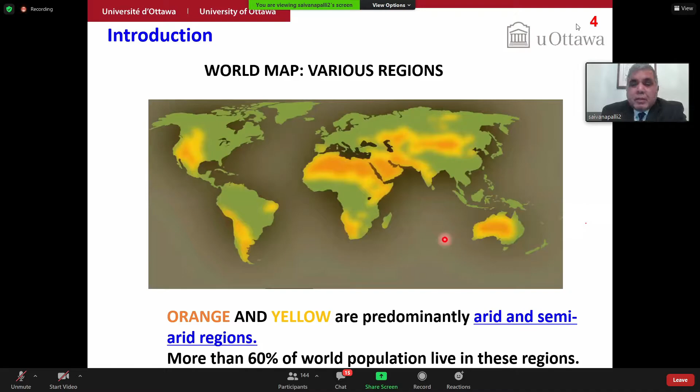That was originally developed by our pioneers, Terzaghi, Skempton, Peck, etc. Irrespective of the region, what we try to do is use the same traditional approaches, but that may not actually be valid in all scenarios.

If you try to see in the world of soil mechanics, below the groundwater table, soil is in a state of saturated condition. But most of the infrastructure that we actually construct is in unsaturated soils, whether it is foundations, retaining walls, roadways, pipelines, etc. There are many things, including slopes. A rational approach would be to take into account the influence of both unsaturated conditions as well as saturated conditions, such that you have a rigorous approach.

I'm not going to discuss all the things, but I would like to provide a background of how shallow foundations and pile foundations can be designed in unsaturated soils, and I will try to compare with saturated soil mechanics.

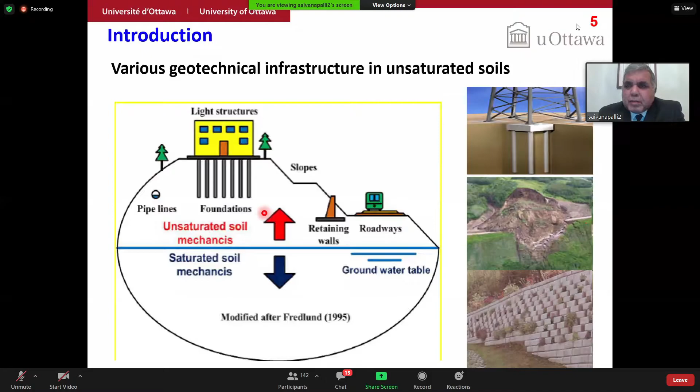I would be going a little fast because I have to cover a lot of ground, but I'll try my best to still provide all the details, though most of the information is in the papers already in the proceedings.

We all know below the groundwater table, the pore water pressure increases in a hydrostatic condition, but above the groundwater table, the soil is in a state of unsaturated condition, which we call the vadose zone. Here there can be either a hydrostatic increase in pore water pressure, or if there is more evaporation, there will be more suction. And when there is infiltration, the soil can actually saturate gradually.

So you can see above the groundwater table, you have to actually use unsaturated soil mechanics, where most of the soils and most of the infrastructure actually is.

When the soil is saturated, it is a two-phase material. When the soil is completely dry, again it is a two-phase material. But in unsaturated condition, you have to take into account the influence of all three phases, which is solids, liquid, and air, or soil, water, and air.

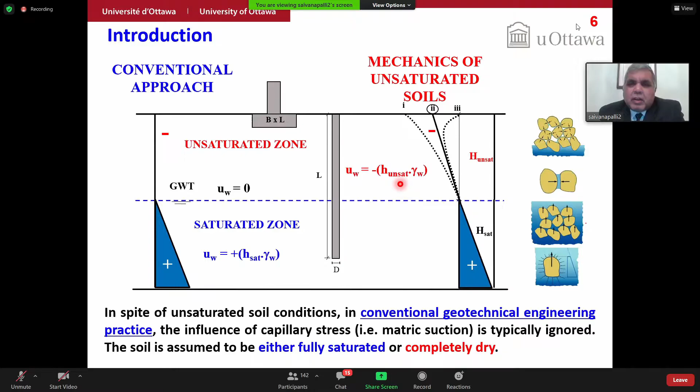In saturated soil mechanics, we use shear strength and modulus of elasticity as tools in the design of foundations. In this presentation, I would like to show how these two properties, shear strength as well as modulus of elasticity, can be used in the design of foundations in unsaturated soils.

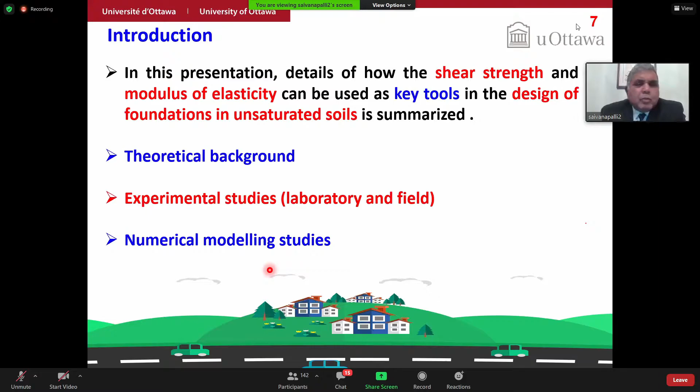There will be a brief theoretical background, then we will verify the theoretical background with experimental studies, both in lab as well as field, and then we will have numerical modeling studies to show how it can be conducted.

So for background, I don't have to explain this, everybody knows. For effective stress analysis, Terzaghi has given the equation, sigma prime equals sigma minus UW. We use this to determine the shear strength parameters, C prime and phi prime.

As we already talked about, we know the soil below the groundwater table is saturated and above it is unsaturated, so you have to take into account the influence of negative pore water pressure. This negative pore water pressure with respect to atmospheric pressure is what we call suction, and you can see there are different phases, and the colors clearly demonstrate that you have all three phases.

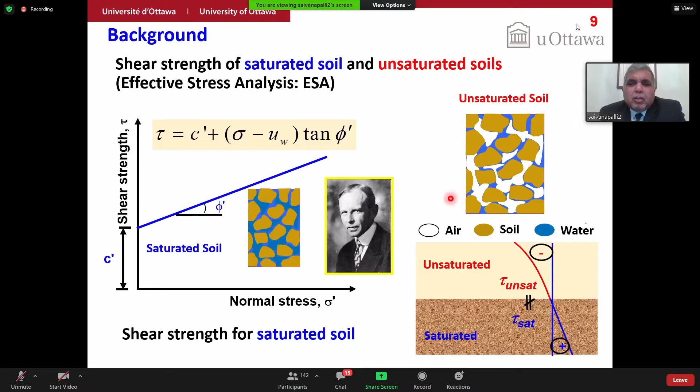Most of us know, or at least it has been briefly introduced, the specific equation that extended the success seen for saturated soils, the equation given by Terzaghi, which is widely used. He tried to use in the same form an equation in terms of net normal stress, sigma n minus UA, and UA minus UW, with one parameter called chi, and chi is a function of degree of saturation.

So when degree of saturation equals 0, the soil is dry, this term vanishes because chi would be equal to 0. When soil is saturated, then chi would be equal to 1. Then you would have an equation that could easily move into the saturated zone.

But a more rigorous approach was actually provided by Fredlund as part of his PhD, working under the supervision of Morgenstern.

You can see sigma n minus UA and UA minus UW are the true stress state variables; they are independent stress state variables. So the friction that is generated due to the influence of net normal stress is not the same as matric suction. So you cannot combine them exactly into one particular equation as you see here.

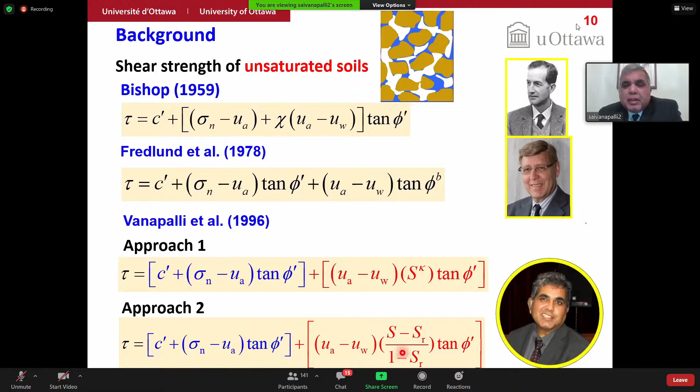A more simplified approach would be to use this without having a fitting parameter. You can take S minus SR by 1 minus SR, where SR is the residual degree of saturation, we will see what it is. All we need is angle of internal friction phi prime and C prime, which is the effective shear strength parameters, and then we can use the soil water characteristic.

What is a soil water characteristic? When a soil is initially in a saturated condition and you subject it to suction, there will be a desaturation. At one particular value, when the suction is increased, water starts escaping and air starts entering, and therefore the degree of saturation actually starts decreasing.

So you can do a little construction method using tangents, and you can find the point approximately where air enters, and the point at which it becomes very difficult to actually remove water by desaturation because there will be adsorbed water, etc.

So there are three zones you can classify to explain how the soil water surface changes: the boundary effect zone where the soil is saturated, the transition zone where air enters and there is a steep rate of desaturation, and by the time you come further, the desaturation becomes very, very slow. So we have developed a technique using approach 1 and approach 2, and you can use the soil water characteristic curve as a tool for predicting the shear strength.

In a similar way, we can also use the soil water characteristic curve for predicting the modulus of elasticity. In the same fashion, it can be used for predicting the bearing capacity, both under drained condition as well as undrained condition.

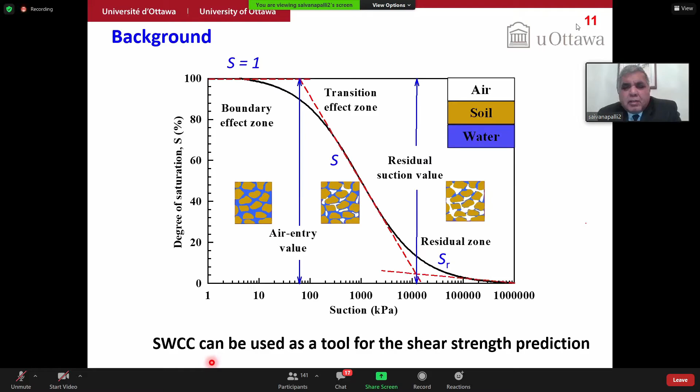So based on what I said before, here is a completely saturated condition, and you can see when the degree of saturation is close to 1, the angle of internal friction phi prime is equal to phi b. Once the air starts entering, the rate at which the shear strength increases starts to decrease, so there is still an increase, but not as much as in the saturated zone.

But when you're in the residual zone, if it is a sandy type of soil, the strength starts decreasing, but in types of clays, it will still be increasing. In some other types of clays, like silts, you will see a nominal change.

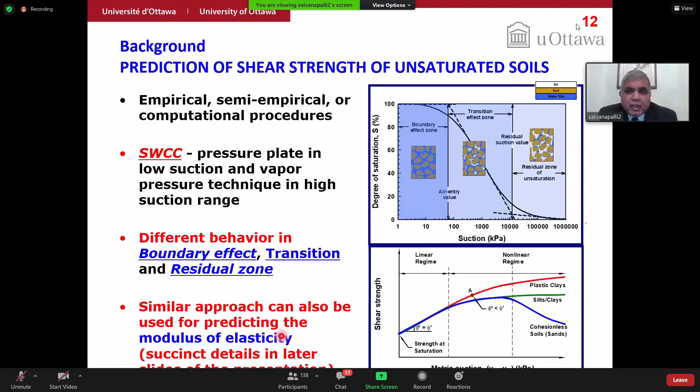The same approach we have used here can be used for even predicting the modulus of elasticity. I'm not going to go into all the details to save some time. Here are some experimental results with which we have predicted using both equations, and there is a good comparison. The symbols represent experimental results, and the continuous lines are the predicted envelopes.

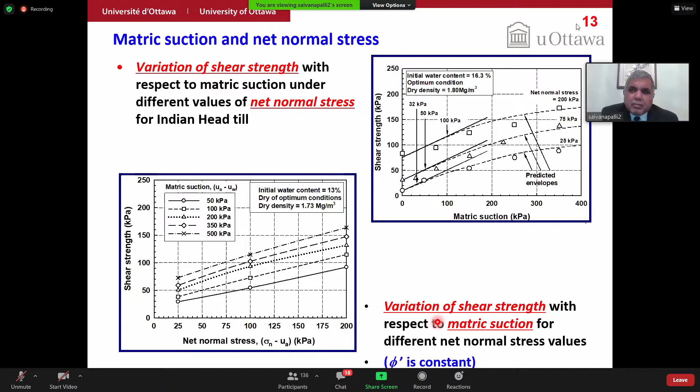If you are cross-plotting, the slope of shear strength versus net normal stress would be equal to phi prime. In other words, phi prime can be treated as a constant value. That means we have a very simple equation for predicting shear strength: one part is the same as saturated soil, and for the other, you need the soil water characteristic.

So now we have seen there is a parallel between the shear strength of saturated soils and the shear strength of unsaturated soils. Let us try to see Skempton's approach. Skempton has taught us what total stress analysis is. Here, phi u is equal to 0.

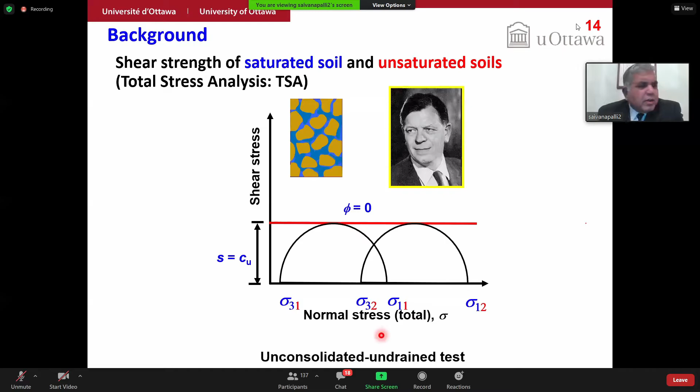You can do an unconsolidated undrained test or an unconfined compression test to get this information. Based on experimental studies, we developed an equation of Cu unsat, which would be equal to Cu sat, that is unconfined compression stress, plus the influence of matric suction, with two parameters, nu and mu. There are empirical equations to find these values, and then we get a good comparison. All we need is the unconfined compression test value, matric suction, and the soil water characteristic curve.

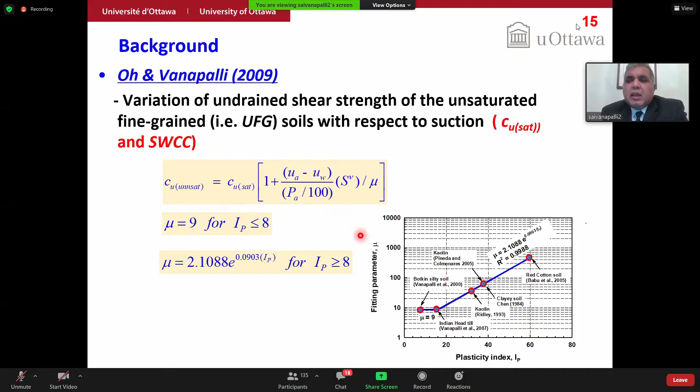You can see the soil water characteristic curve can be used as a very good tool. Terzaghi and Skempton have given us the bearing capacity equations in undergraduate classes, and everybody is introduced to these topics. So I wanted to see how we can use this approach.

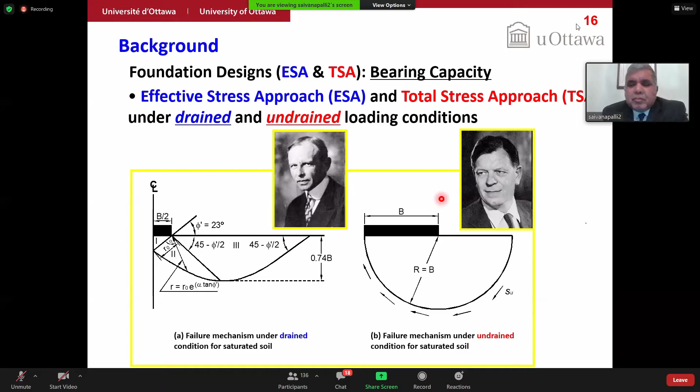It should be a simple approach, but one that can be extended for unsaturated soils. That is the key objective of this presentation, which is the work of several PhD students, but I have combined all these pieces of work from these students to provide theoretical background, some experimental background, and also numerical studies.

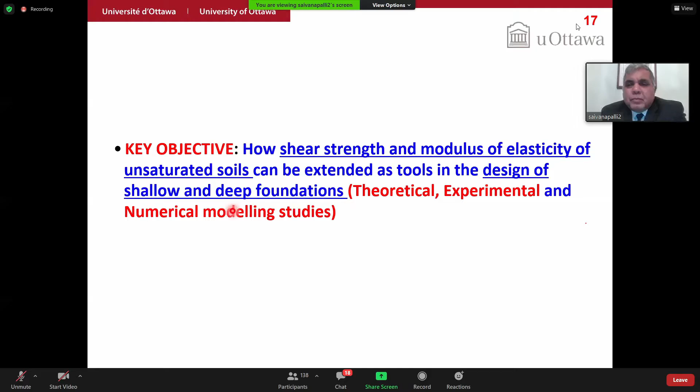The numerical studies are more recent work undertaken by two students who are co-authors, Mengshi Tan and Cindy Shinting Chen. I'll show their pictures. Now, what are the theoretical studies?

Let us see how you can modify the effective stress approach that you have seen for saturated soils to unsaturated soils. This is the equation we already know, Terzaghi's equation: C' Nc plus gamma Df Nq plus 0.5 gamma B N gamma. Everybody knows this. This is for a strip footing, and these are the bearing capacity factors.

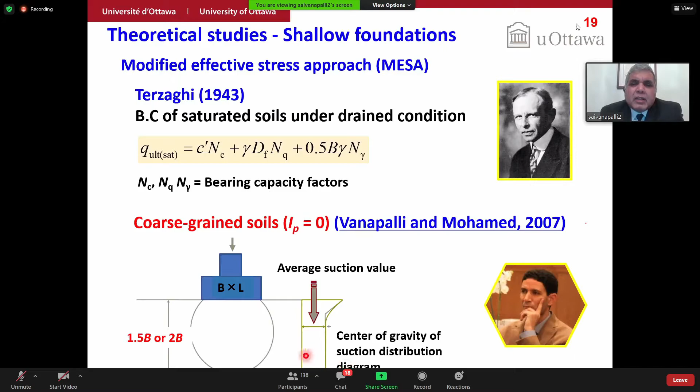One of my students, Fathi Mohamed, has developed a technique. If you look here, the stress bulb that develops is typically below a certain depth, in this case 1.5 to 2B. All you have to do is find the centroid of the unsaturated zone, take the average suction value, and use that value in the equation.

I'm not going into all these equations. All the information you need is the soil water characteristic curve and angle of internal friction. All the other parameters would be the same.

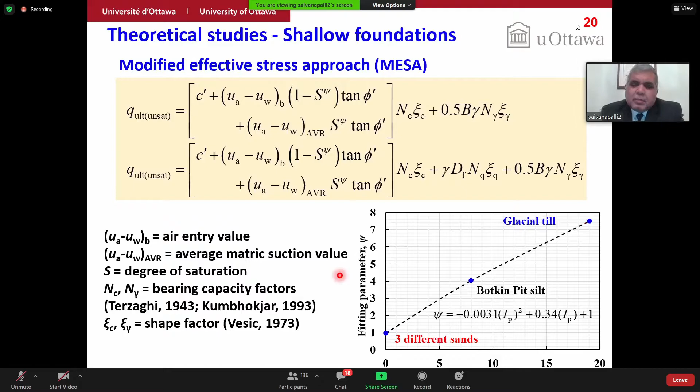Similar to shear strength, we have a kappa parameter. Now for fitting the bearing capacity, we have another parameter, psi. We have seen that sands have a value of 1, and for other soils the value changes. You can use that and compare the bearing capacity. There is a good comparison, and we will see the experimental results in a little while.

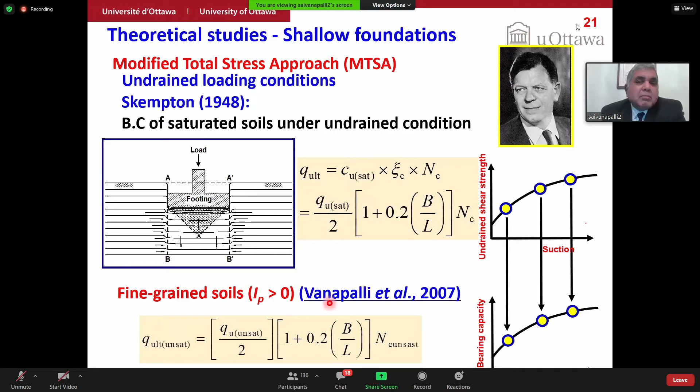Now, the same approach can also be extended for total stress analysis for undrained loading conditions using Skempton's approach. For undrained shear strength, we already have an equation, and there is a relationship we can develop. This is the equation already known for saturated soils, but for unsaturated soils there will be a little modification, though the terminology remains exactly the same.

I'm not going to get into the details of elastic modulus, but a similar approach can be done. You can derive an expression similar to the shear strength equation, similar to the undrained shear strength. You need two constants, alpha and beta, which are fitting parameters. Depending on your plasticity index, you can get mu values, and for modulus of elasticity, you also have relationships for alpha and beta values.

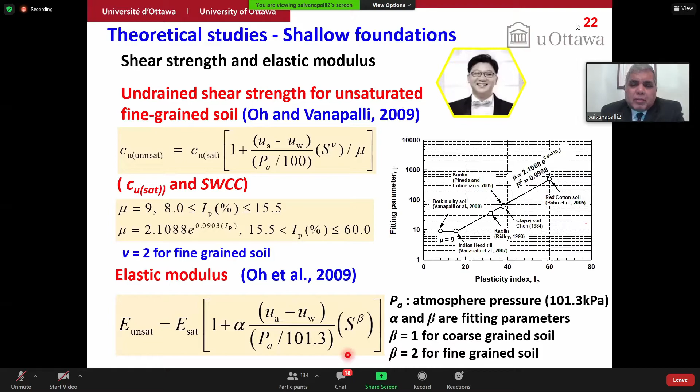These are the theoretical studies for shallow foundations. Let us have a look at pile foundations. This is an end-bearing pile, or in general, the ultimate load carrying capacity is shaft friction plus point end resistance.

What we have done is develop an equation similar to the shear strength and similar to the modulus of elasticity, so you can have an expression that can be developed. I'm not going through all this equation—please look into the paper, which provides all the details.

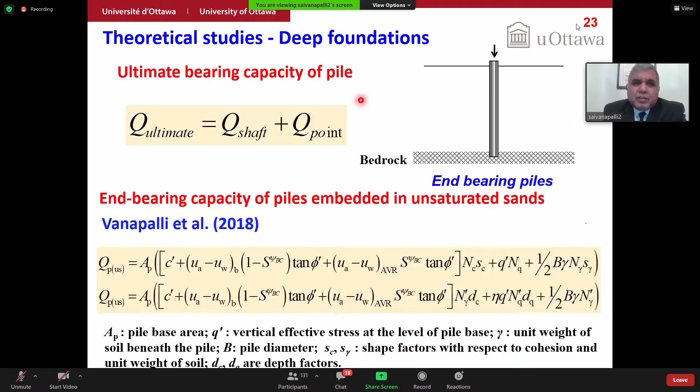Now that is for effective stress analysis, but for total stress analysis, we know there is the alpha method, beta method, and lambda method. We have modified the alpha method, beta method, and lambda method. We know that skin friction develops all along the length when it is fine-grained soils, so it is typically under undrained load conditions.

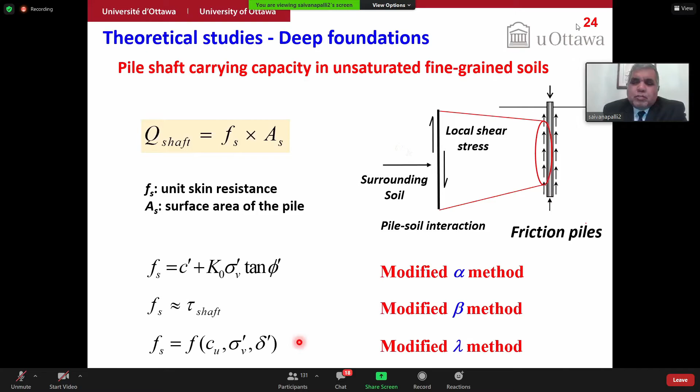We also have to know what the ultimate load carrying capacity is, so we adopt the alpha method, which has been modified. I'm not going through all these equations, but we already know that unit skin resistance is a function of undrained cohesion, effective stress, and wall angle friction. This is the equation we already know.

What we have done is make this a function of Cu. Previously, in saturated soils, it is Cu; in unsaturated soils, it will be Cu unsaturated. We already have the Cu unsaturated equation that we developed, so we can incorporate it into this equation, which is useful for finding the carrying capacity for fine-grained soils.

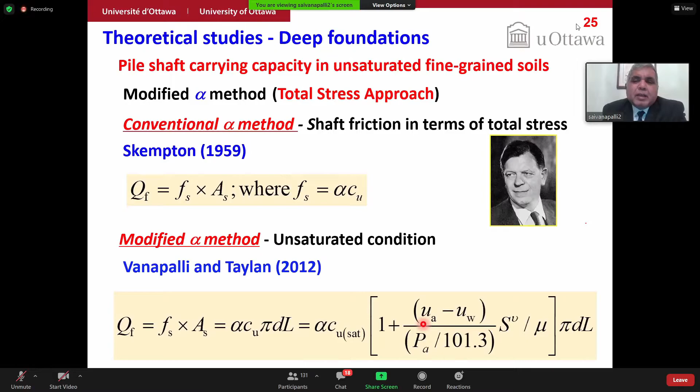There is also the beta method, given by Burland and Chandler. Again, I'm not going into greater detail about this equation, but it is well known in the literature.

All the undergraduate students are also introduced to this thing.

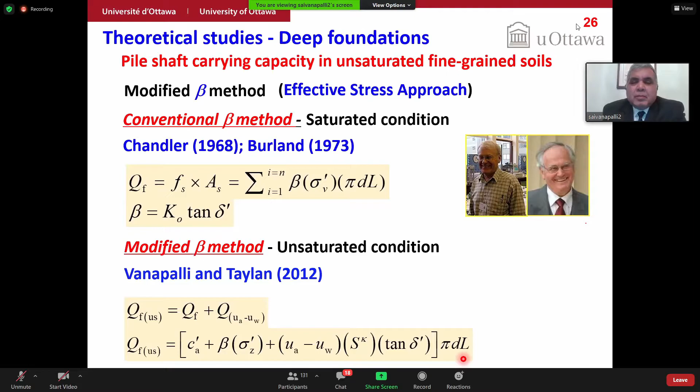Now what we are trying to do is add the contribution that arises from the matric suction, which would again be a function of the relationship based on the soil water characteristic curve. You can use that as a tool and develop an expression something like this.

You also have the lambda method, which is a combination of both the alpha method and the beta method, because there is not going to be a true effective stress analysis or a true total stress analysis. There are scenarios somewhere in between, so in those cases you can use the modified lambda method.

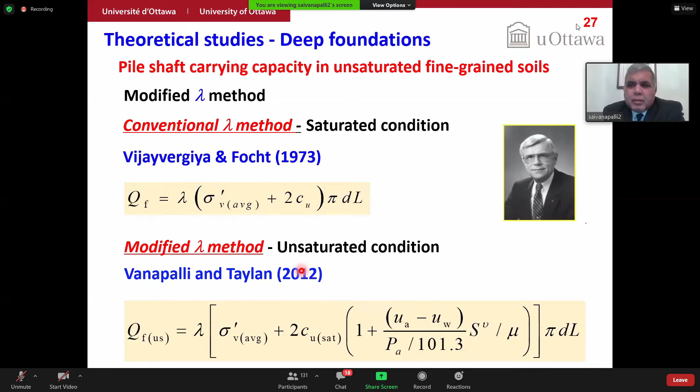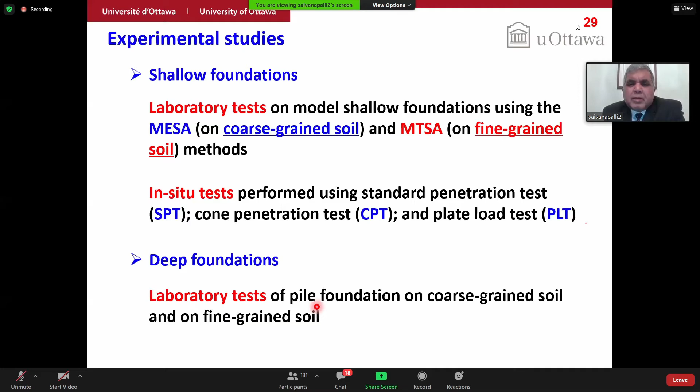So for experimental studies, we have seen the theoretical background, which is consistent with unsaturated soils. Some laboratory tests have been conducted, and also some field tests for shallow foundations. The same way for deep foundations, I will show some laboratory tests and also some comparisons from other studies.

This is the University of Ottawa bearing capacity equipment. Those of you who have read the autobiography of Terzaghi know he used a wooden tank to develop the equation for bearing capacity of saturated soils.

Q ultimate is equal to C' NC plus gamma D NQ plus 0.5 gamma B N gamma. I told my student Fatima Mohamed, Terzaghi had a wooden tank, and that too had a leakage problem, which is why he focused on sands.

Now you have a steel tank, and you try to develop equations along similar lines to what Terzaghi developed. So this student, Fatima Mohamed, has developed an equation, and I have already shown some theoretical background about this.

What is the average suction value from the centroid? What is the average suction that you can actually measure? That would be calculated and then used in the theoretical equation we have developed.

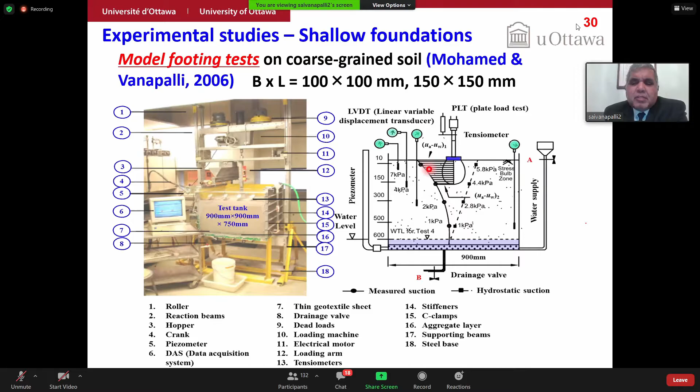If you try to see here, he has done the test with both surface loading and penetration. Also the foundation is placed at a certain depth, footing placed at a certain depth, and you can see that the bearing capacity increases rapidly. Even a few kPa of suction can increase the bearing capacity by a lot.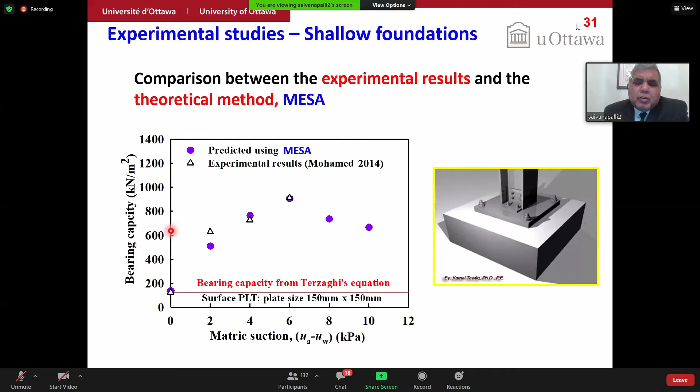So we can understand that the suction is actually bringing the particles into a closer state of contact, and therefore there's an additional friction that is developed, which contributes to extra shear strength or extra bearing capacity.

In the same tank, the student has used cone penetration tests. We have tensiometers to measure the suction. We have a tank water supply which can saturate the specimen, the tank, and by bringing down the water you can actually increase the suction.

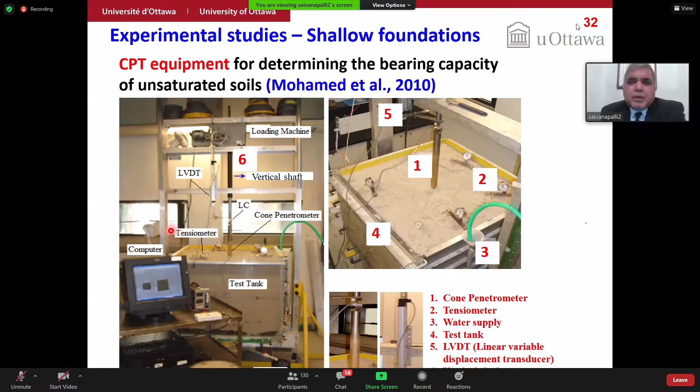So cone penetration tests have been done, and we have developed equations for saturated sand as well as unsaturated sand. We also have taken some.

Yes, we have 5 minutes. Okay, you can take 7 to 8 minutes. Okay, thank you very much. Please give me a couple of extra minutes.

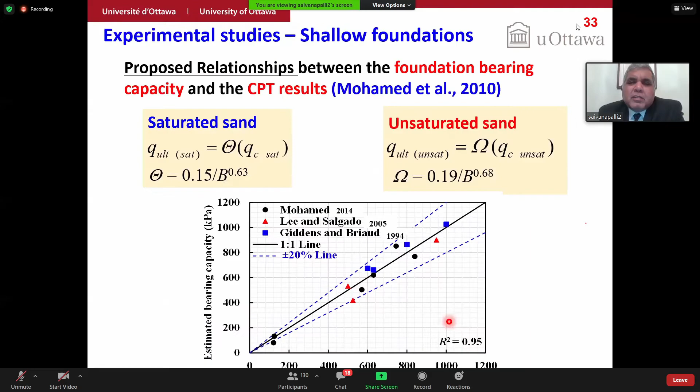You can see there's a good comparison. Now we did experimental results the same way, and you can see how it has been conducted in the paper. What you can see here is that the estimated bearing capacity and measured bearing capacity show a very good comparison.

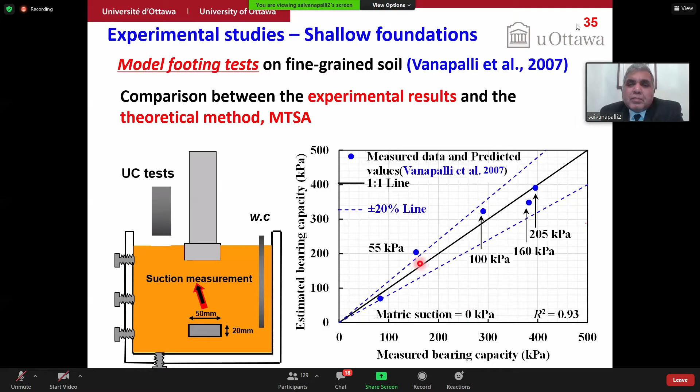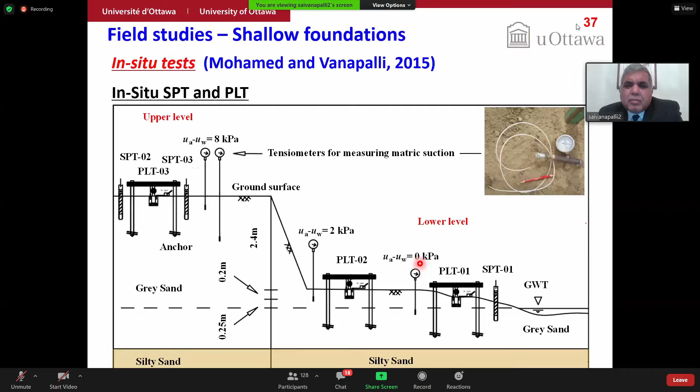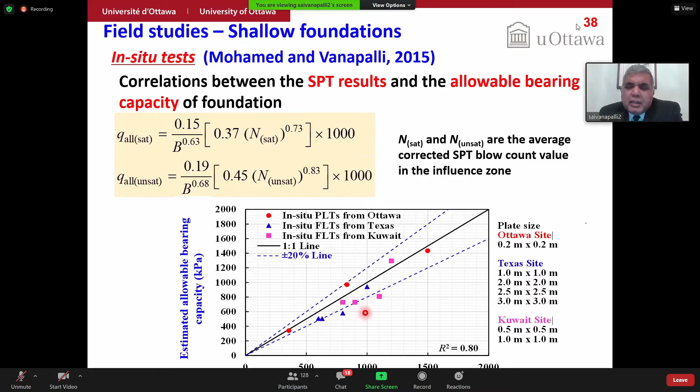We also did field tests near an airport, very sandy soils at a low water table and close to saturated conditions. Plate load tests have been conducted, standard penetration tests have been conducted, and we have developed equations, comparing with some of the data published in the literature. You can see again that these equations are working well, with a good comparison between measured and estimated values.

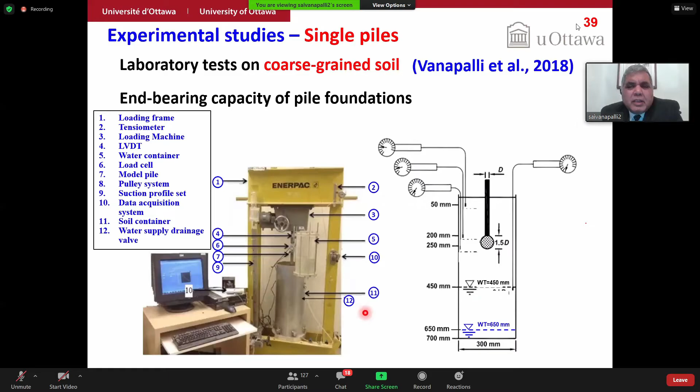In the same way, we have done tests for the plate load test. This is a recent pile load test where we changed the groundwater table and developed the equation. The theoretical background has already been provided, and available equations have been modified, showing a good comparison within plus or minus 20%.

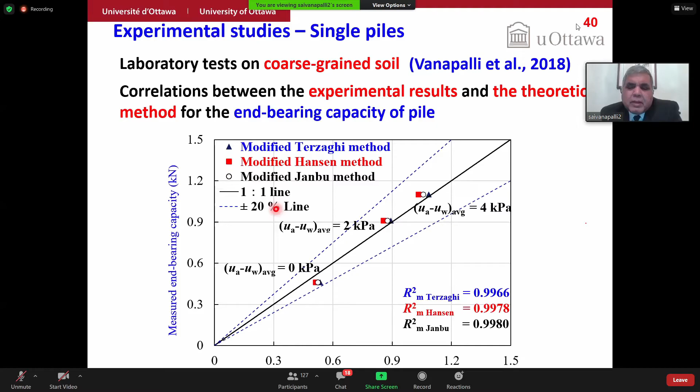So we did again the alpha method, beta method, and lambda method in the laboratory tests, and you can see there are good comparisons between the measured and estimated values.

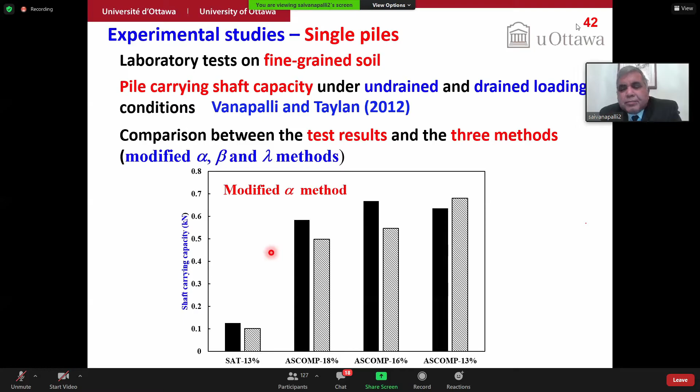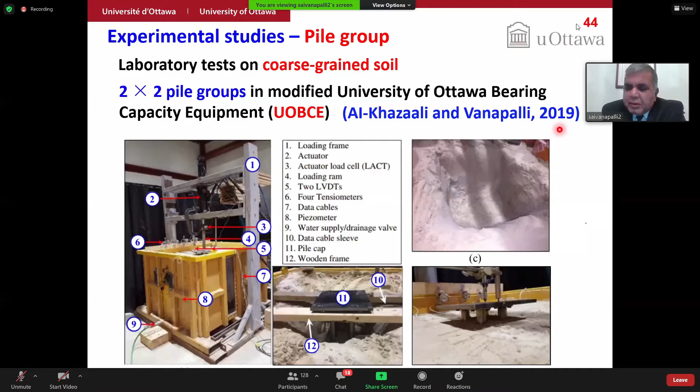We also have done pile groups. I'm not going into all the details, but you can see that we also have developed an approach for how you can calculate the ultimate bearing capacity, and those are detailed in those papers.

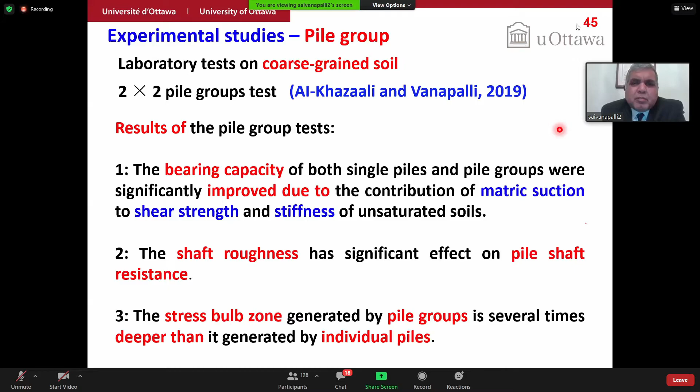So I'm not going to discuss a lot about the pile groups because I have focused the theoretical studies mainly on single piles and mainly on shallow foundations. I will very quickly move through numerical modeling.

Even though we have some theoretical studies, it is very important for us to understand how you can actually model using the software that is available, such that you can take into account different scenarios and do sensitivity analysis.

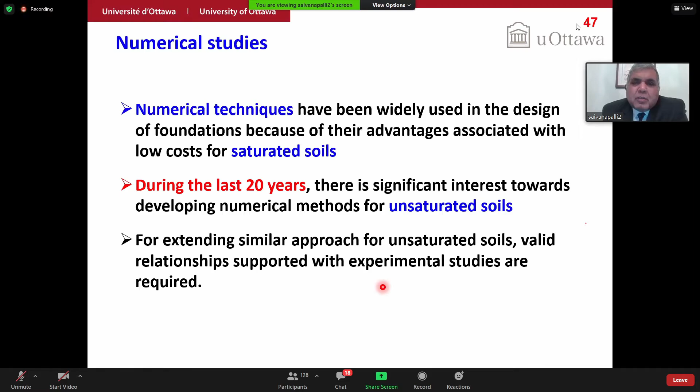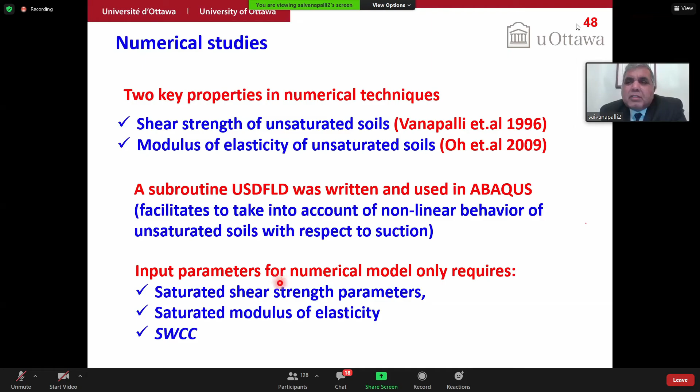Recently we have been using ABAQUS. ABAQUS facilitates taking into account the nonlinear behavior of unsaturated soil, meaning the nonlinear behavior of shear strength as well as modulus of elasticity can be incorporated. So all we need is saturated shear strength parameters, saturated modulus of elasticity, and the soil water characteristic curve.

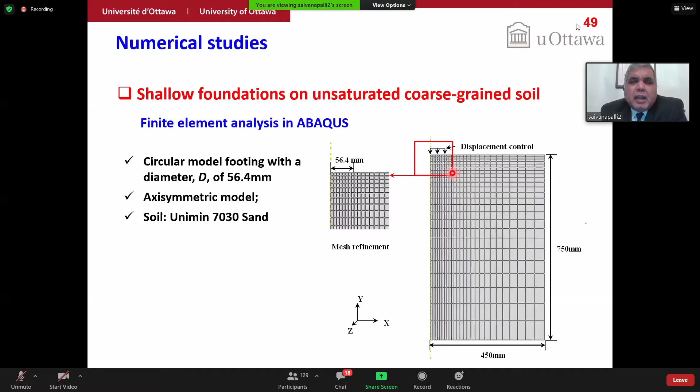I'm not going to go into all the details, but where the suction variation is more, we can have a closer mesh, and afterwards you can have a rougher mesh. ABAQUS is a good tool where you can write your own subroutines and take into account the nonlinear behavior of unsaturated soils.

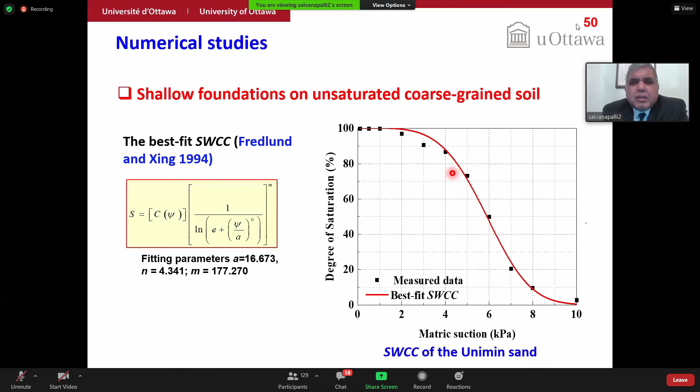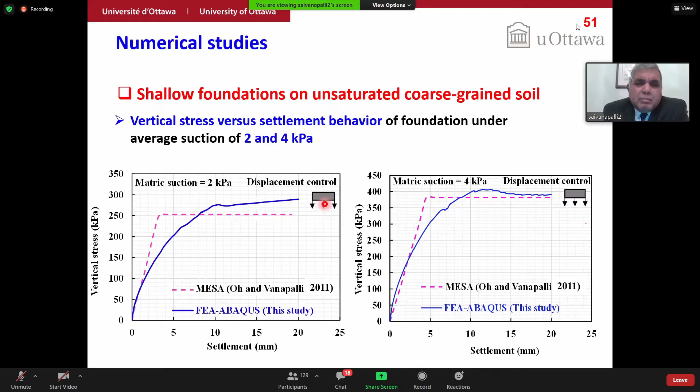That information on the soil water characteristic curve is directly included into ABAQUS software, using the theoretical background in the subroutine. We have compared ABAQUS, which provides a better relationship with the actual experimental program compared to MESA, and I'm showing you some comparisons using ABAQUS and the measured bearing capacity in MESA, and the results are good.

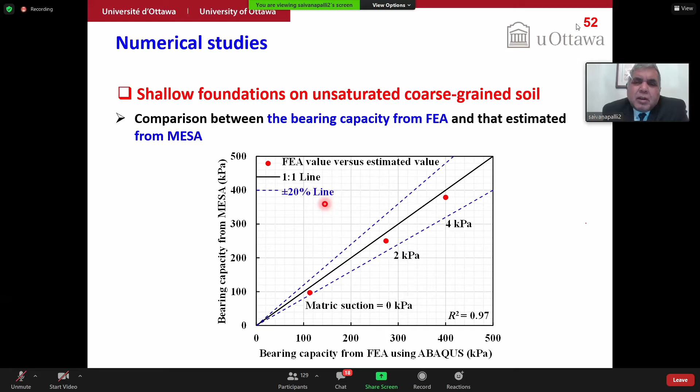In the same way, we did some modeling studies for fine-grained soil shallow foundations. Again, there are good comparisons between bearing capacity and matric suction. In other words, what I'm trying to impress is, if you have simple tools like saturated shear strength parameters and soil water characteristic curve, even for field studies you can take into account the conditions available in the field and model them.

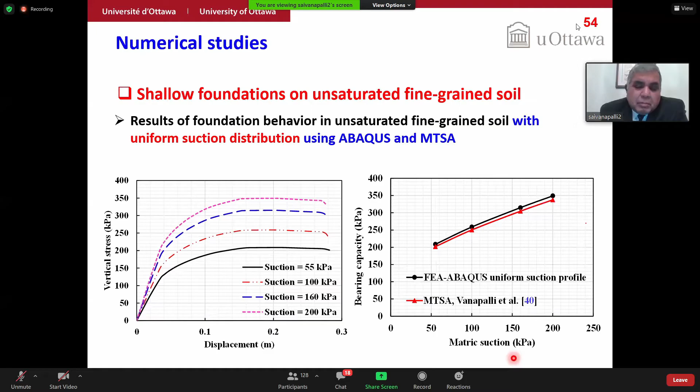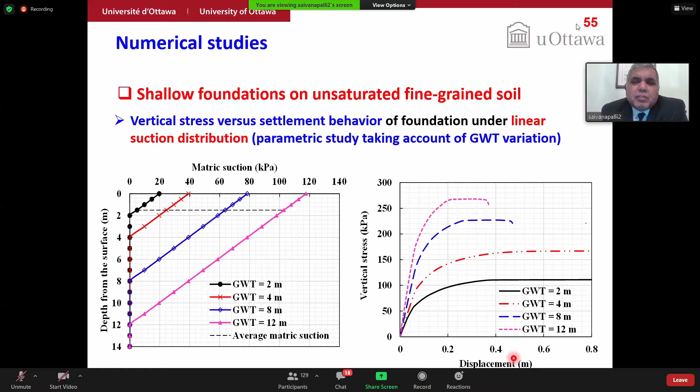You can also do parametric analysis where the groundwater table has been changed, and then see the sensitivity analysis of how the bearing capacity increases, how the load settlement behavior changes, because we also need the information of the settlement behavior. So load versus deflection behavior is also important.

Excuse me, Professor. Yes, I'll wrap it up. One minute. Okay, conclude in five minutes please. Excuse me, how many minutes? Five minutes. Okay, let us say five to ten minutes. Five. Okay, please. I would have appreciated to know this a little bit earlier.

Okay, pile foundations. Also, you can model these things. Now if you try to see here, the modeling has been done.

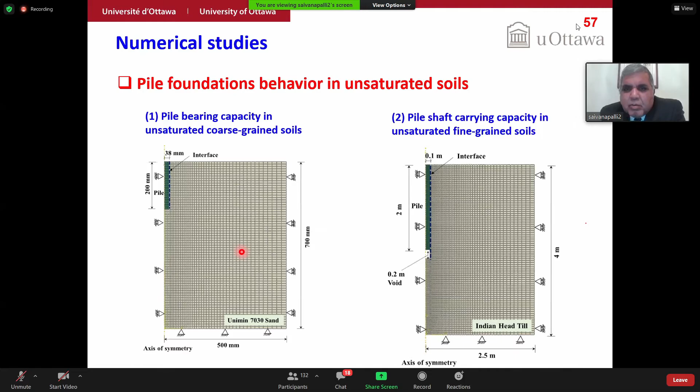On one side, you can see the pile bearing capacity in coarse-grained soils. Here, pile bearing capacity in fine-grained soils. You can see that you can incorporate the information of the shear strength parameters plus the soil water characteristic curve, and you can see the comparisons.

We have actually changed the groundwater table to get the information using the theoretical analysis. Also, if you do the modeling, you can see for one diameter pile that we have taken here, there is a good comparison.

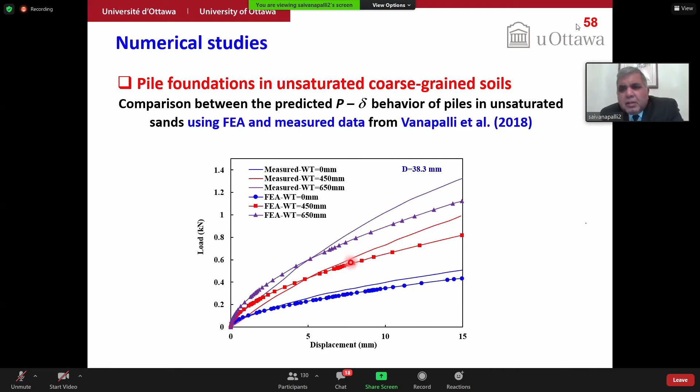So what we have done here is we are comparing theoretical studies with experimental studies, with modeling studies, and modeling studies again with theoretical studies. In all these things, there is a good comparison.

Again, sensitivity analysis or parametric study can be done with groundwater table. What you can see is, when the groundwater table is at zero, which is saturated soil mechanics theory, you would be having a very low capacity, but as the groundwater table is at a greater depth, the carrying capacity actually increases.

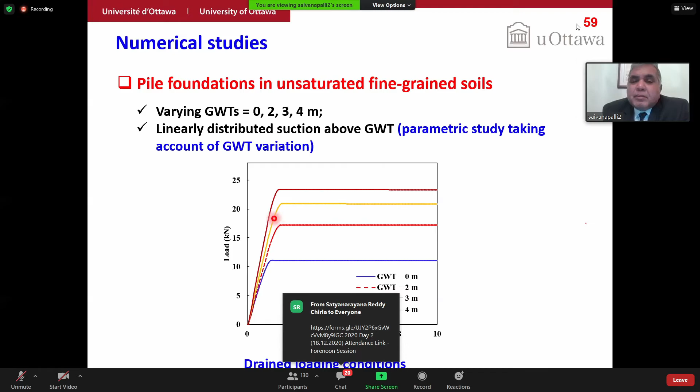So with ground improvement techniques etc., if you're able to control the groundwater table, you can take into account the influence of suction and take advantage of the suction, so that your load carrying capacity is much higher.

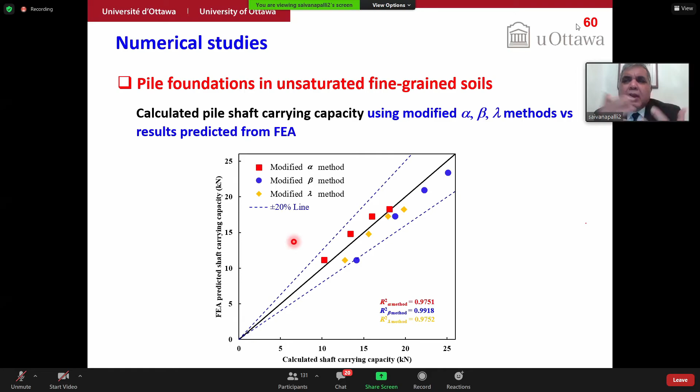So you can see there is consistency between the experimental methods, the theoretical methods, and the modeling methods, which gives confidence for practicing engineers. The theoretical framework developed is consistent with saturated soil mechanics, and it is very easy to understand. So now I'm coming to conclusions.

We have numerous proofs that when we want unsaturated soil mechanics to be taken into practice, it should be simple and easy to understand. In the last 20 years, I have been working with my students to develop a framework that is consistent with saturated soil mechanics. Only then can the practicing engineer understand it.

In all these cases, first we take the saturated shear strength or saturated modulus of elasticity, and combine the additional component obtained from suction. We have shown from experimental studies, theoretical studies, and numerical modeling studies that there is good comparison. These are simple modifications for interpreting saturated soils such that you can get the unsaturated soil behavior.

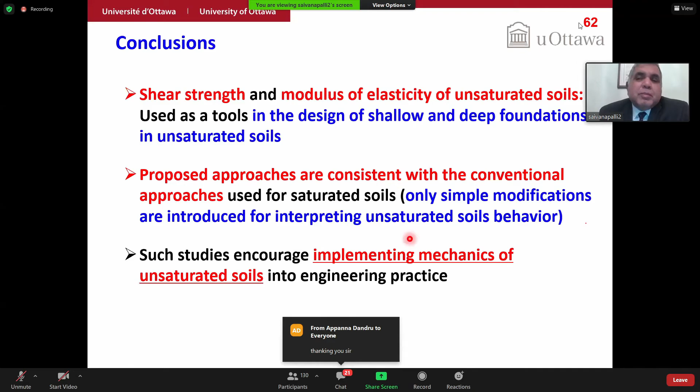So such theory, modeling, or methods would definitely be encouraging for practicing engineers.